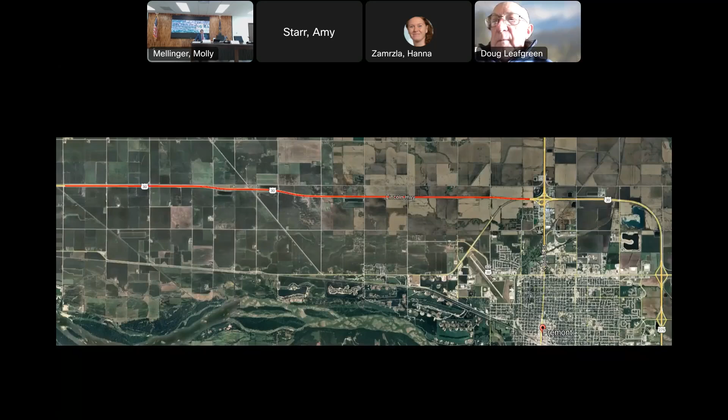I know there's work to do in District 3. This is Highway 30, another one I believe we've been working on even longer than 275. This one took a long time to get through some Corps of Engineers issues. We started building mostly out on the District 3 side and worked it back this way, but we finished this last year. We're now working on a relinquishment project on Old 30 to hand that over to Dodge County.

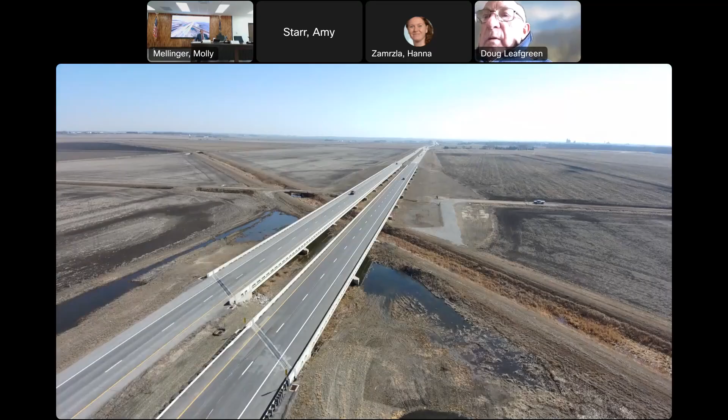I think Keith even drove this just the other day. He said it was really nice, he could go really fast. It's a beautiful highway, it's a safe highway. They changed a lot. I remember driving to Columbus, cars coming at you, kind of like Highway 92 is today, but there were a lot of passing issues and whatnot, volume got up there. Finally, we got that done.

Another corridor we worked on hard is this one, 75 south of Plattsmouth. I don't know how many of you go to Nebraska City, but this thing was on the books forever. We actually graded this out back in the 90s, and that project kind of died. We had the grading out, we had to regrade it to current standards and do some other stuff, but the pavement's now in. This one has a little bit different layout to it, as we got a curbed median.

See that you don't have that open median. It's a nice highway that will eventually continue down to Nebraska City. We're actually doing a maintenance project south of here, but this one turned out very well. I think folks down there are happy with it. There were some safety concerns with the schools in Murray.

Every time we get one of these, like you guys have talked about Humphrey for a long time, and we ended up with an R-cut there. That was a solution. Since the R-cut, there have been no fatalities at Humphrey. We didn't want to even start with a fatality at Highway 1 Murray, so we put that in.

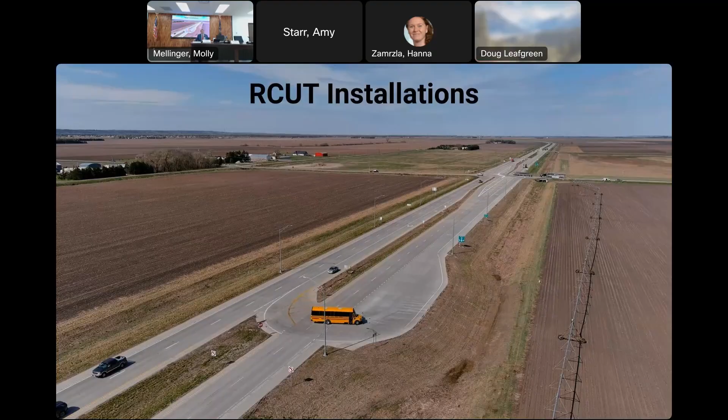Next slide, I believe this is the one in North Bend. Right out here on 30, we used the same approach. There were concerns about crossing traffic, high speed, and a lot of school traffic. So this is yet another Humphrey—Humphrey was the first, this is the second, and we now have number 3 down there. This R-cut installation is at North Bend, and the other one you see is at Murray.

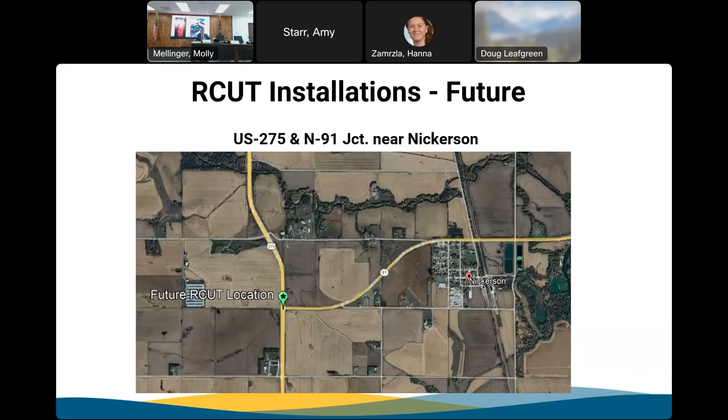We also have a future safety project that we qualified for. Up north of here, on 91 at Nickerson, we're having some issues, so there's another one planned for that. It'll be coming in probably within the next 4 years, depending on funding.

These things are what we call Pi-Lits. We purchased them because we thought they'd be good—they're sequential flares. I don't know if you've been out there at night, but sometimes you need something to jump out and speak to you, especially in the Omaha area with the volume of traffic we have. These have evolved technologically to the point where you can deploy them in any order right out of the rig, and they talk to each other, setting up and flaring out directionally to guide traffic.

We've got 6 or 8 sets of these. We deployed them out to our maintenance guys that are out there all night. The state patrol has now seen them, and I think they're going to pick up on them too. They speak loudly to traffic—you can mount them, put them under cones, or set them out on the road by themselves. It's smart technology we've taken advantage of, and I think it's a lifesaver. Anything we can do to guide traffic, especially with all the night work we do, is a blessing.

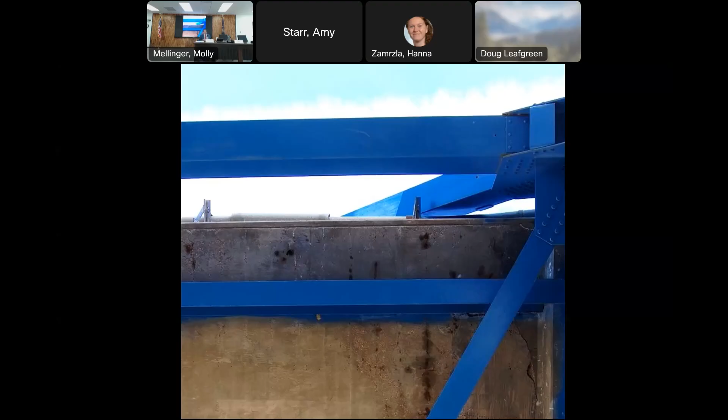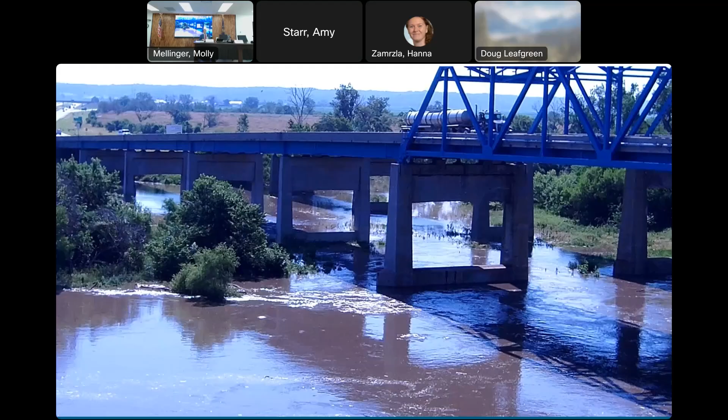The next slide shows that during the floods we had—not too recently, maybe a couple of years ago or last year—we got high water and flooded out over in Council Bluffs. We weren't sure how the channel was performing over there, so we just popped the drone out, flew over it, and took a look to see whether the concerns were real or we were okay. So those are the uses.

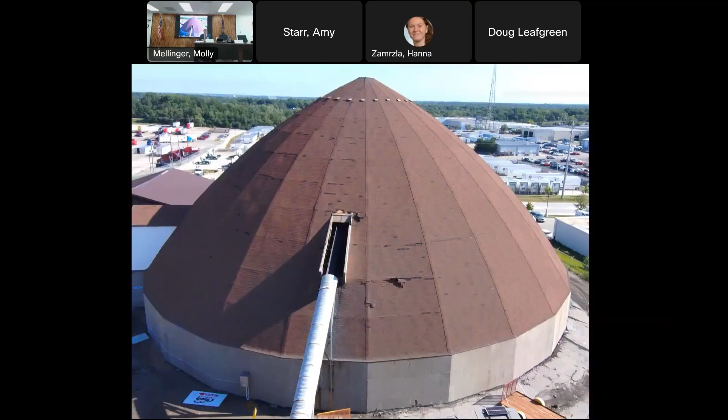And then we use it for survey. We can do all LiDAR type surveys. We can map the ground, we can cross section, we can check against cross sections. It's kind of speeding up some of the old work we used to do by hand. It also gets our crews off the road.

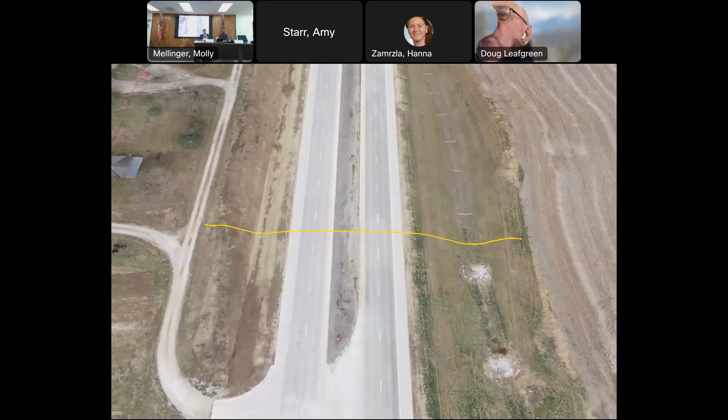We're using some of this to get up into culverts, up in traffic, up under bridges and places where it's tough to go in and close lanes and restrict traffic. We want to be as user friendly as possible when we're out there, and these drones are helping us do that. You're going to see a lot more of that. It's all tied into project design now, but that technology is helping.

So those two things, that's two little safety nuggets. And then in addition to the R cuts, we hope to keep fatalities to a minimum.

Another thing we're building, and it's not in the presentation here, Vicki or Heath alluded to it earlier. 192nd Street, we're building a diverging diamond interchange. We built one in Lincoln at Northwest 48th. For those of you who've used that, crosses over. Maybe some of you drive down in Missouri or other states have placed these in different locations where they had a number of incidents.

That DDI interchange, you can read about them on our website even, but they eliminate conflict points for traffic. Crossing that traffic over, you line up all the ins and outs with the ramps coming on and off, and you eliminate the crossing of opposing traffic. It gets rid of a lot of opportunities for people to hit each other.

Especially in tight quarters, which we have in 192nd, we can slip a lot of traffic through there, safely and at high volume. So as the city develops, that 192nd Street is gonna get a lot of use. We plan on installing some of those — we're gonna put another one at Highway 370. We're gonna put another one at Highway 50 over I-80.

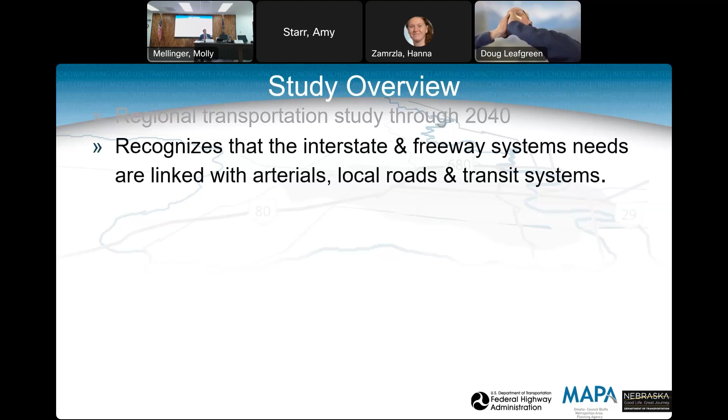So that study overview and MTIS looked at mostly the interstate corridor from our perspective - that regional study recognized the interstate freeway system's needs. There's your main routes. Next slide.

So look back up a little bit. Those should have come in one at a time, but a lot of the work we're doing on a lot of these routes right now, we're band-aiding, we're fixing, we're trying to buy time. But if you're a user in the city of Omaha, you know where the pinch points are. If you drive down Dodge Street, 680, 480, whatever, you know where you hit the traffic, you know what time of day you hit it. We're working on one of those right now.

We've started in on one of these MTIS projects - Q Street, wrapping around towards Highway 50. There's actually two projects in there, but we're going to add a lane every day that backs up and holds traffic up.

User cost is through the roof, and we're trying to add that lane. Now, it gets worse before it gets better, and that's what we're telling everybody. The trucks jake brake and all those things happen, so we're just gonna have to live with that for a year. But we're getting through it. We've got Hawkins Construction out there going full guns, and we'll get that lane added between Q and 126. Then we're adding some additional capacity lanes going into Highway 50, because that traffic actually queues up onto the interstate at times during the day. So that's one pinch point we're working on. We've got others we're gonna look at.

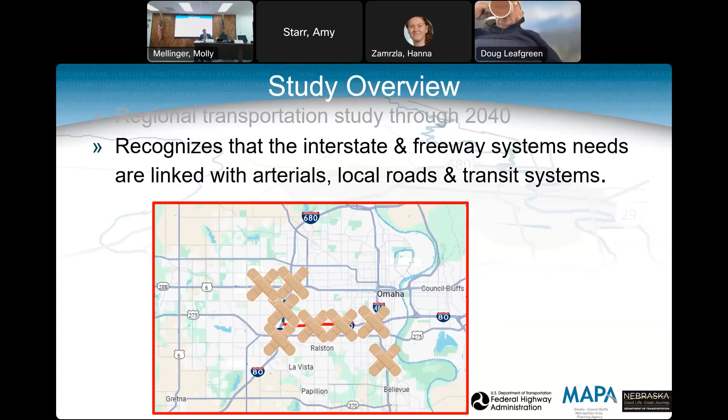So the executive committee, everybody got together. This was a MAPA type effort. This is a MAPA effort, getting everybody coordinating, thinking in the same direction. On the stakeholder committee were all those folks. You can go on.

So strategy package 7, roadway improvement. I know these things don't mean a lot, but there's a lot of critical corridors identified right there that money's gonna need to go into.

Now, this is the district program meeting, and we'll have another one in 2 years, so it doesn't do any good to talk a long ways out on that. But just to tell you, in 2019 this study was done, and we're finally getting some projects rolling. We're gonna get and keep some projects rolling, okay? So I guess that's the crux of it, but you see the map there.

I have another presentation, we can't get it to load unfortunately, but it has a little more detail on traffic volumes. Perhaps at another meeting. But you see the map there, traffic volumes are high. I think our peak volume is 180, 190,000 cars on I-80 down by 50th Street. We've got up to 118,000 cars on Dodge a day going through different areas. We've got a lot of people to serve, and we've got to keep this existing system functioning.

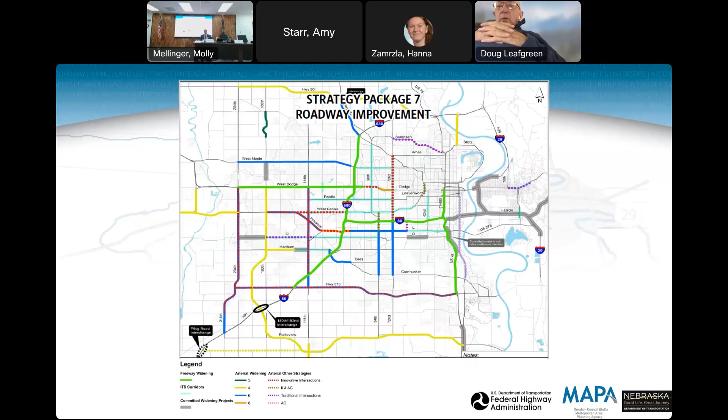That's kind of what the planners have to lay out in a grid that makes some sense. It's kind of like eating an elephant. When you look at trying to throw financing over the top of a grid like this, if that was zoomed in, you can see the years up on top. The years scroll across, and the needs are everywhere. So we've got freeway and interstate needs, and it amounts to more or less $1 billion in today's dollars. The financial folks have a lot of work to do. We have a lot of work to do to get these things identified and designed and actually get working. So I don't want to get into that too much, just thought I'd throw it up there.

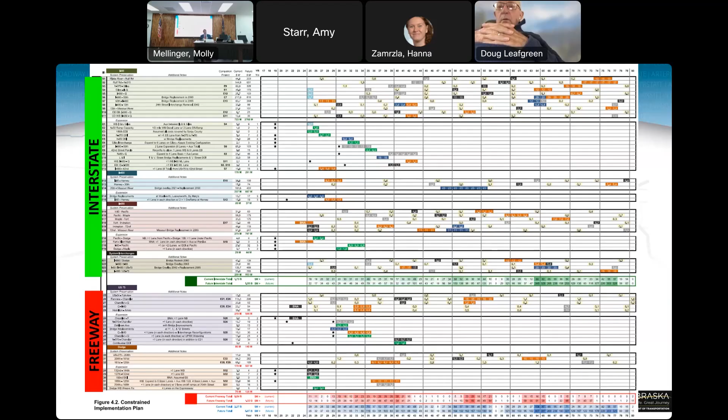So, upcoming active projects. This is one we just had a plan in hand for, down there. It's in an area of I-80 by the grain elevators, if you know where those are. We chopped those off once when we widened the interstate some years ago, and it looks like we're gonna have to lay that back a little farther. We have 3 lanes in each direction right there, but we need 4. We've got bridge concerns down there as well. That's gonna be a bugger of a project.

It's really hard to squeeze 190,000 cars through 3 lanes. It'd be kind of like the bottleneck we got right now in Q Street, maybe on steroids, but we'll get it done. We gotta phase that. Trouble is a lot of it needs to be replaced. We've overlaid it a number of times, and overlays aren't lasting more than about 5 years. That's just kind of wasted money, one of those Band-Aids we put on there. We need to tear into this, go full depth, and do a lot of replacement.

What's next? We got, yeah, this is one in the Pacific Street area. We're gonna add a lane through there. Those of you who come under there at night know that backs up. We're gonna add a little bit of capacity going up there underneath Pacific and up into the Dodge Street corridor.

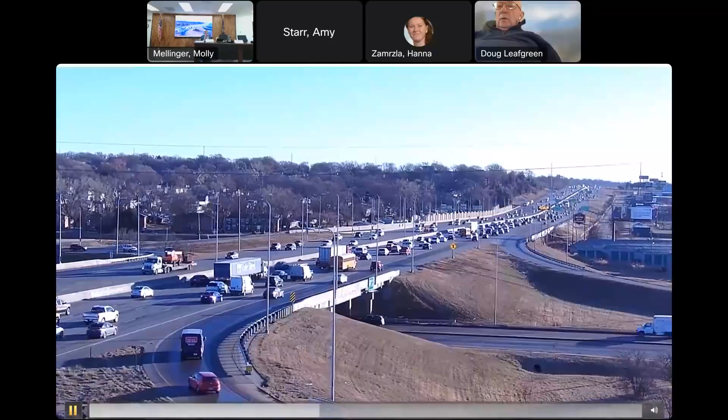I think we've had 5 bull haulers, at least 5, tip over and release animals onto the freeway system. We've had 4 shootings, I think, this year. I think one of them was naked. We've had just a lot of different things you don't expect.

And deck joints are probably our worst nemesis. When they blow up, you really gotta go in there and hit it 24/7 and get those fixed. And we got a lot of them.

But that's the system, that's our work, that's District 2. We don't forget about the other routes we have. We got all the way down from Highway 1 on the south end. We got 91 and routes on the north end, the Blair area. They've got a beautiful bypass. We've got some nice stuff going on up there.

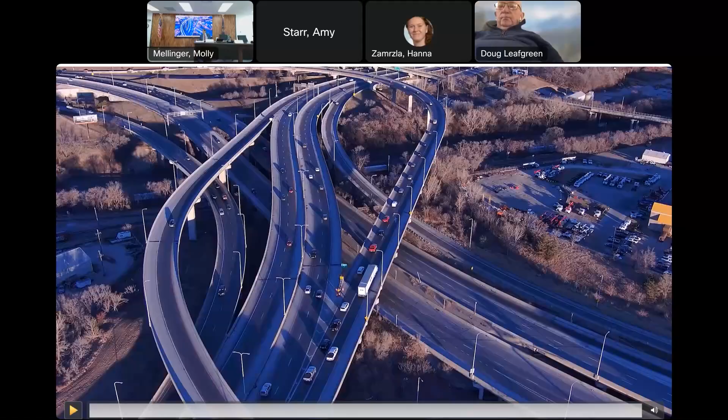All corners of the district, we're busy 24/7. Any more money that anybody could scrap up, we figured District 7, District 8 could probably pitch in a little bit after they saw the video, but maybe not. No sympathy. We'll keep at it, we're working hard for you.

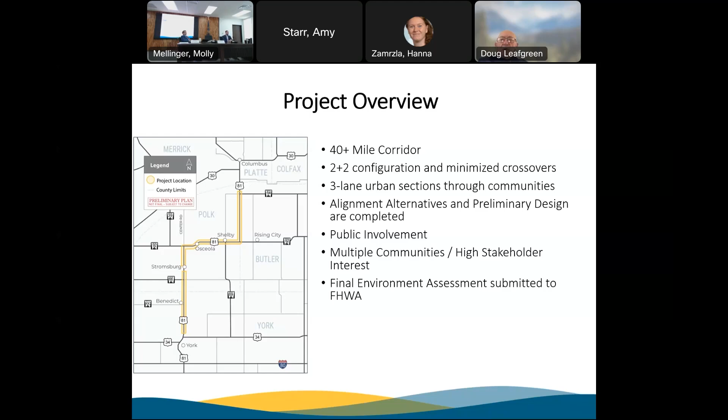To date, we've developed different alternatives along this corridor using that 2+2 concept, and discussed those with the public through different public meetings and stakeholder events. We presented a preferred alternative and compiled that information into a final environmental assessment, which has been submitted to our federal partners for review.

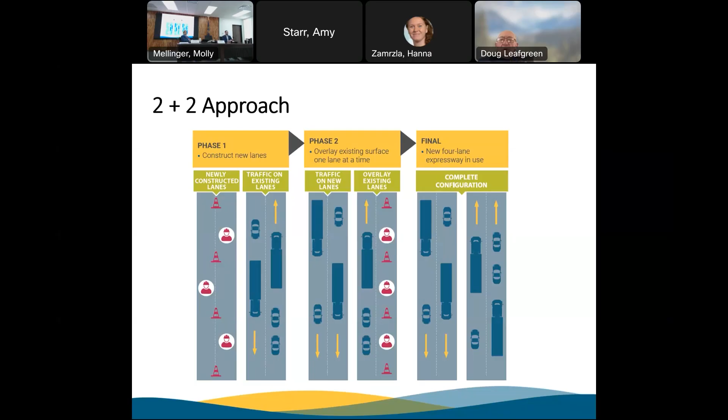So let's get into a little more detail. This 2+2, we'll start with the majority of this. This is the rural 2+2 section. So we have 2 lanes of traffic in each direction, typically around a 10-inch doweled concrete pavement. And then we have 8-foot shoulders on the outside. The lanes are separated by a 54-foot median. Within that median is a 4-foot inside shoulder on each side.

And the existing lanes will undergo some type of asset preservation strategy, so it's some type of mill and overlay to just really preserve that existing asset.

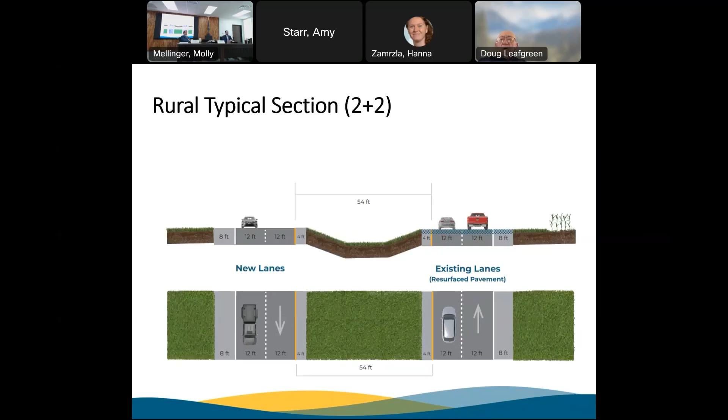A little bit of nuance here from what we typically presented for the expressway systems and creating 4 new lanes is we do have 2 different areas that have a 3-lane section. Really, again, this gets into what fits along the corridor for these communities. The left that you're seeing on the screen is in Osceola, and this is a 3-lane section. So we have 1 lane of traffic in each direction separated by a center left turn lane, and we do have 8-foot shoulders on the outside.

In Shelby, we're going to utilize the existing curb section through here where we have a lane in each direction separated by that center turn lane.

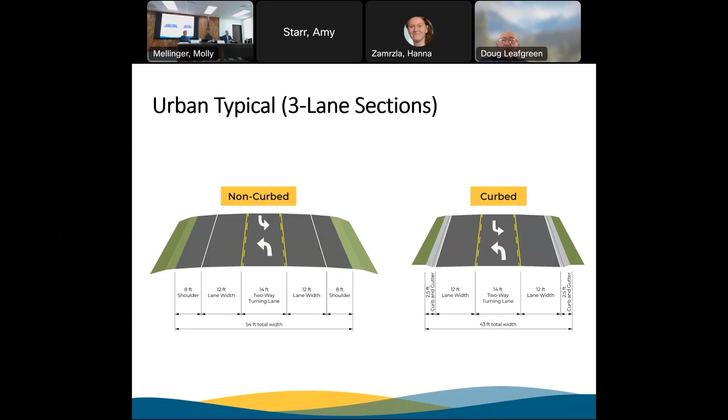So getting into, we kind of talked about that we've worked towards that final environmental assessment. Let's just take a step back of what got us to that point. So with this 2+2 approach, we look to develop a study area. We look at impacts from adding lanes from either the left or the right of those existing lanes.

We look at impacts to resources in the area that are wetlands, streams, channels, hazardous materials, threatened and endangered species. We look at noise and air studies through the area for adding these lanes. So section 106, which is historic properties to the area, and then we have section 4(f), which are the parks and recreational areas to the area. We also look at impacts to businesses, personal residences, so any types of potential for relocations along the corridor, impacts to say pivot irrigation systems.

We develop these alternative analyses, and then we collectively look through these different types of impacts of which side of adding these things will have the least amount of impacts. We present this to the public. We'll get into more detail on public involvement today, as well as then which is our preferred alignment for the corridor. And then we document this as far as the impacts to the corridor and ways to potentially mitigate those.

And then we document that decision with related impacts and the work we've done with the public into an environmental assessment with our federal partnership.

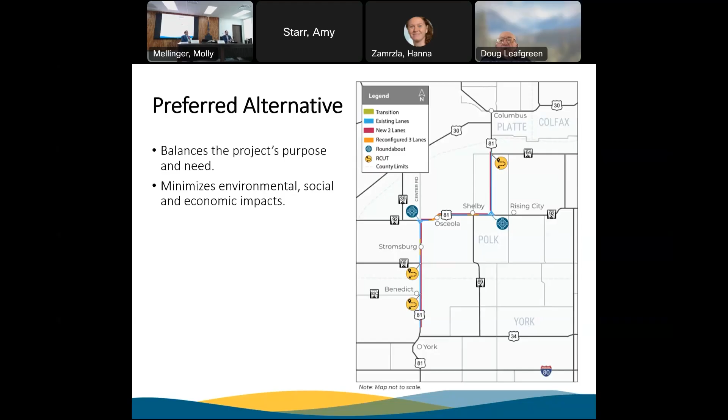We looked at the environmental, social, and economic impacts to develop this preferred alternative. Next slide. So going through this in some different segments.

Starting on the south end, just north of York, and then moving up towards the north, you can see that the new lanes are kind of a maroon color, with the majority of the new lanes on the right side of the existing, or the east side direction.

Through this area, we do have a couple areas where we're going to utilize R-cut intersections, and if you look up towards the north, you can see a symbol for a roundabout. As we're changing this corridor, moving from north-south to west-east, we're going to utilize these roundabouts to act as more of a curve through that area.

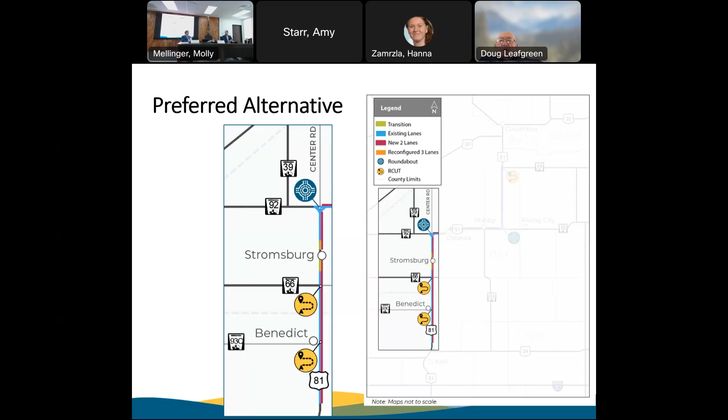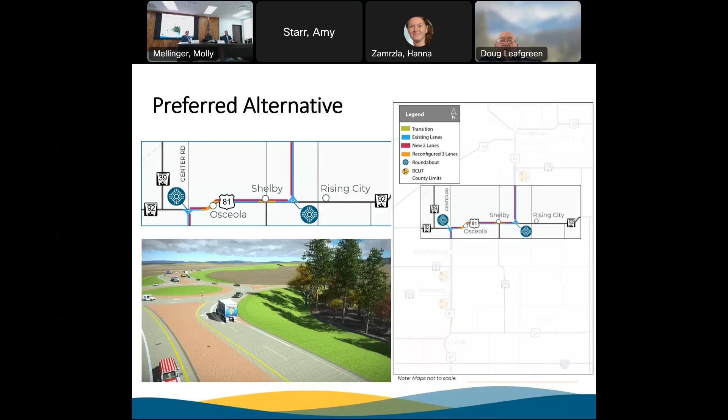Moving directionally from west to east, through the communities of Osceola and Shelby, the new lanes will be designed and constructed on the left side of the existing lane, which is the north side here direction. You can see again that roundabout area that will then take us into the final segment up towards the north side.

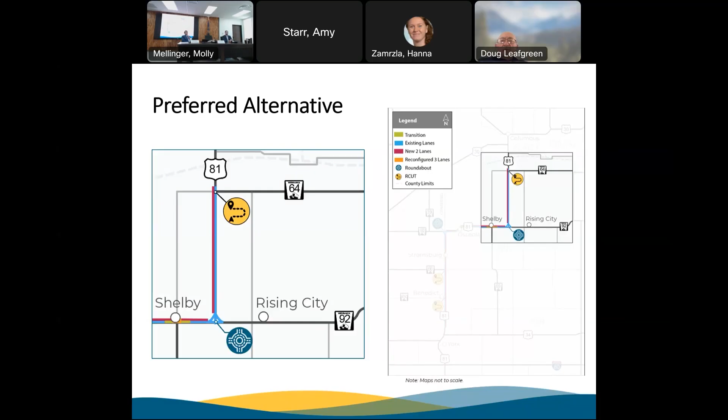Moving north from Shelby, going towards N64, the new lanes will be placed on the left side of the existing lanes, or the west side, directionally up the map.

Looking at the overall operations of people entering and exiting on 81, and that through traffic on 81, we saw some different crash history, and we did see a need to really make sure that we're improving the overall safety and operations of this. The R-cuts were selected to prioritize the 81 corridor, so people on 81 can continue to go through the corridor, whereas the approaching lanes on 81, they cannot make a left turn at that intersection, and so they'll have to go up a quarter mile or half a mile or so, and then come back around, make a U-turn.

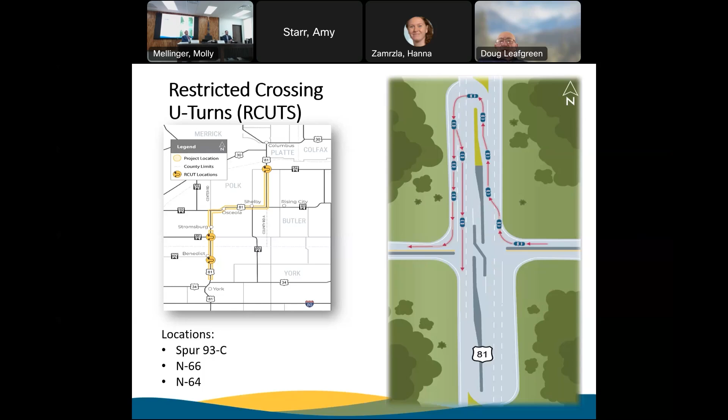Next slide has a better picture of this, I think we're coordinated on this one, although I think mine has a little cooler vehicle going through here. We do have a semi truck that's actually, again, not able to make a left on the highway, this is on US 81. So they had to go up again about a quarter mile or so, and then make a U-turn to get in the direction they were looking to go.

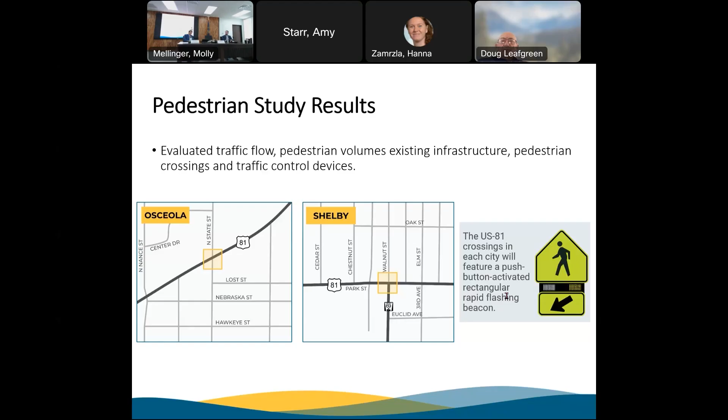We also talked a little bit about, from public comments, pedestrian access, as well as speed limits to town. So as part of the project, in the communities of Shelby and Osceola, we evaluated traffic flow, pedestrian volumes, and really the existing infrastructure, what they're actually using for pedestrians out there between the signage and other devices they have. We looked at these pedestrian crossings and traffic control devices. Our proposals will have safer and more efficient movements of pedestrians through this area, where we're going to utilize some new signage. We'll create more efficient crossings, and then we'll put in flashing beacons with a push button control for crossing through these areas.

Another big portion of these expressway systems, in adding 2 new lanes, is really the access control. NDOT has the duty to regulate public access abutting our highway. With the addition of 2 new lanes, we want to make sure we provide a safe environment, that it's efficient, and that we're reducing accidents and conflict points through there. We look to do that by potentially relocating and consolidating different accesses, and establishing the correct spacing through here, because we do have higher speeds through here. With this type of approach, we typically make sure we're providing full access at county road intersections, and we also look at what kind of developments are out there.

So these are our private residences, our businesses, that's where the traffic is going. They're using that multiple times, possibly a day. So we make sure that we do not disrupt those operations as we go through this access control.

We start with our different types of spacing, that'd be 1,000 foot, no more than 3 per mile. We do try to encourage some right-ins and right-outs, similar to that R-cut situation, maybe just a field drive to where farmers are getting in and out with farming or ranching operations. They want to keep their drive there. So we've been providing more just right-in and right-outs and not allowing them to have full access to the left intersection.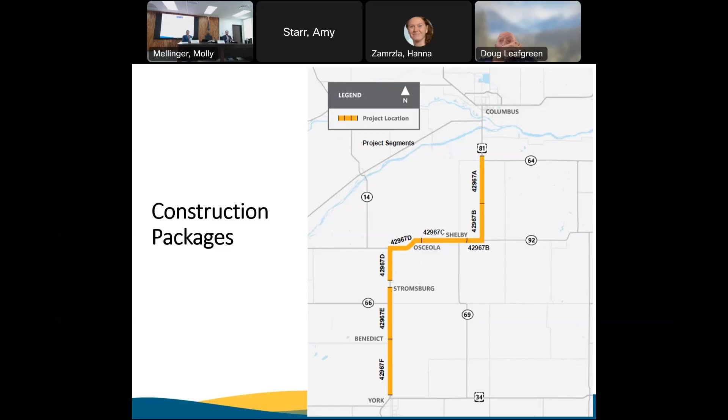We have been developing this entire 40-mile segment. We have separated it out into different construction packages. I'm not going to focus on those today, just understand there are 6. We are looking at what makes sense from a logical standpoint, going either north working south or south working north. We want to make sure that as we develop these, we can make them useful, so we're not looking at starting construction in the middle of this corridor. We want to make sure that as soon as these are constructed, they're useful to the public. As of right now, we are working towards fiscal year 2029 for this development.

With that overview, you should have in front of you a document with the resolution. I am going to ask the Highway Commission to sign this resolution. This would be a recommendation to the governor for approval for project location, design, and access control on the project.

Question for Kyle. Quick question, being a new person here, why are we required to propose this or pass this?

Yeah, legally. Is it? What statute is it? My name is Jeff Schroeder, I'm the chief counsel. Nebraska law requires, particularly for access control, that we get the consent of the Highway Commission and then go to the governor for final approval for us to put in place control of access. We also do that with respect to location decisions, so that NDOT can go forward formally with your approval. Typically we get projects that have a lot of right-of-way involvement, and this does, it's got right-of-way on every mile. So that's why they come to us.